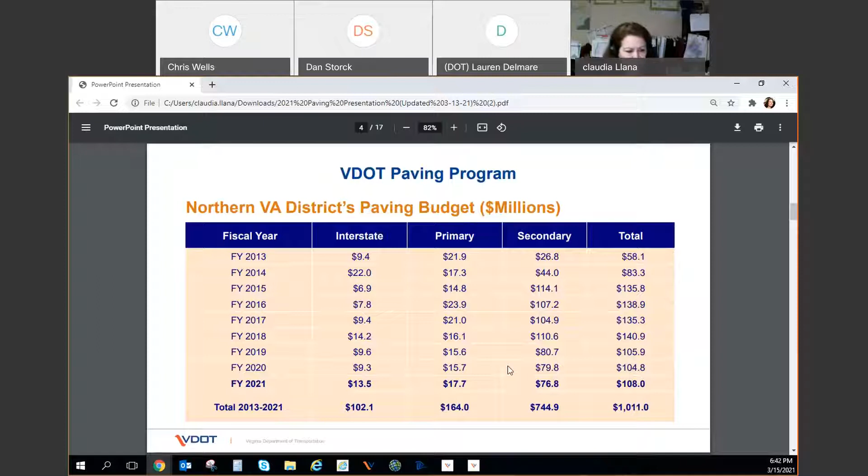And I will explain how those decisions are made coming up. In terms of the planning, yearly, at this time of the year, we're already gathering data for the next calendar year, 2021. In summer and fall, we take the data that has been gathered and put it together into bid packages as we make decisions on which roads need to get paved. We in the Northern Virginia District send those packages to our Richmond central office, where they compile the bid contracts that are put out to the contracting community.

Those are advertised for bids. Bids are received and evaluated, and a selection is made about which contractors will be given the work, and contracts are executed. Also, beginning very shortly, the actual paving begins, and for this calendar year, 2021, we have started the pre-construction meetings. In April, the actual paving work will begin.

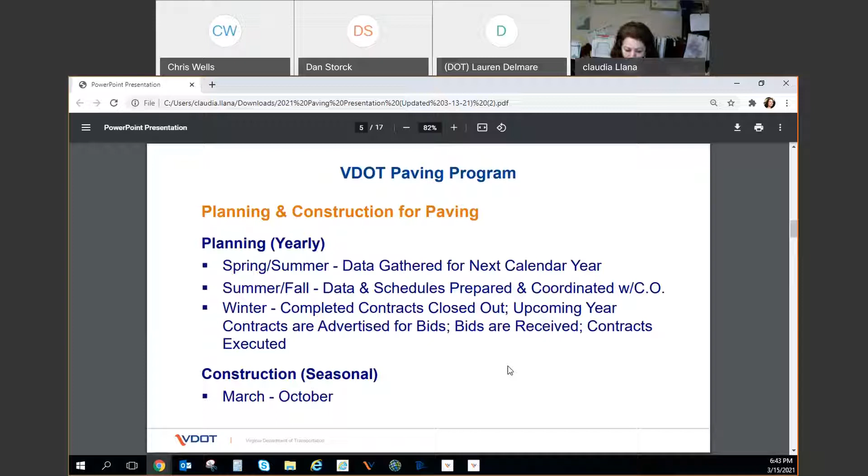In order to decide which roads get paved, we evaluate several factors. One of the main ones is the condition of the pavement. Also the traffic volumes. We avoid locations where there's going to be an existing project—for example, the Rolling Road project is going to get widened and the whole road will be reconstructed, therefore we don't do repaving in that particular location. We also avoid locations where we know that there will be large utility projects.

Another thing that we do is compile together areas that are close by. If in a neighborhood a main street has been determined to be in very poor condition and needing repaving, we also address the roads around it that also need repaving. This gives us economies of scale so that the contractor doesn't have to drive around, but would rather spend his time and our funds in paving rather than traveling. As you can imagine, our maintenance crews are out there very frequently and they're familiar with what the pavement conditions are in different areas, so we get feedback from them as well in our decision-making process.

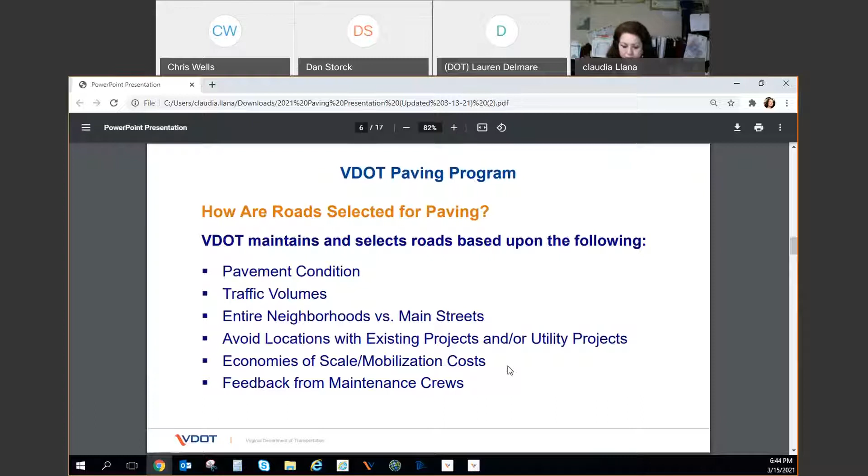In Northern Virginia, we have two highly qualified PhDs that review all the data that is gathered and help us make decisions about which roads to pave.

In terms of how we collect our data, we use specially fitted GPS-enabled vans with cameras that view under and to the sides of the van, gathering data about pavement distress, rutting, and texture. This information is collected digitally and put into reports shared with our staff for evaluation.

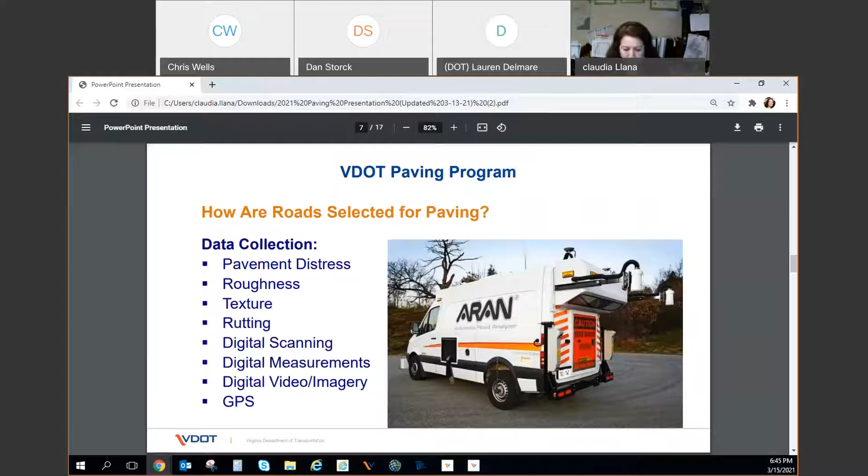That data is used to determine the condition of the pavement based on a system we call the Critical Condition Index. This was developed first around 1998 by the U.S. Army Corps of Engineers, and we've found it very useful and adopted it.

The CCI, or Critical Condition Index, goes from 0 to 100 for the different roads, 100 being excellent and 0 being very poor. We use color codes to match condition with rating. Roads in excellent condition are shown in green, those in fair condition are yellow, moving down to reddish and deep red for very poor condition.

Roads that have a CCI of 60 or better are grouped into the sufficiency rating, and we look at the percentage of roads that are in sufficient condition for the different road systems.

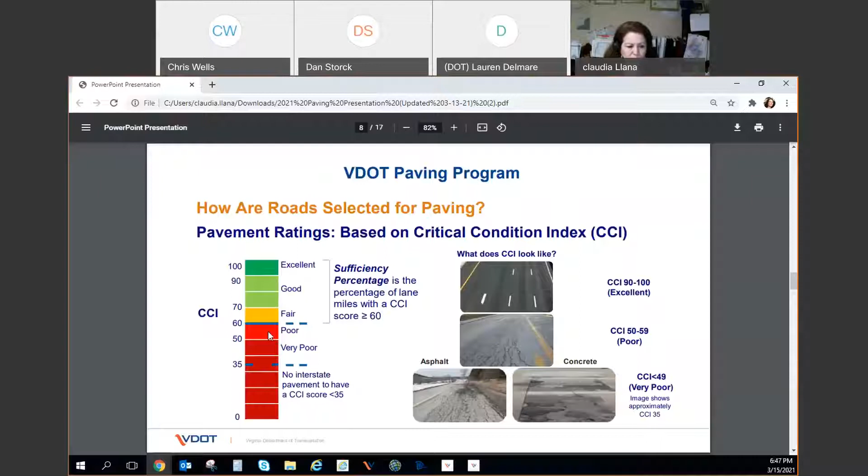This data is collected more frequently for interstate and primary roads. For those, we send out the specialized van, contracted annually. For secondary roads, we used to collect 20% each year, so it normally takes about 5 years to collect data for the entire secondary road system. Beginning this year, we're grouping high volume secondary roads, such as Braddock Road, those with AADTs, or average annual daily traffic, in excess of 3,500 vehicles, and treating them differently.

We're collecting that data annually. The reason is that interstate and primary highways have more volume and people travel faster, so in order to avoid crashes and take more care of higher traffic roads, we have higher goals for them and inspect them more frequently.

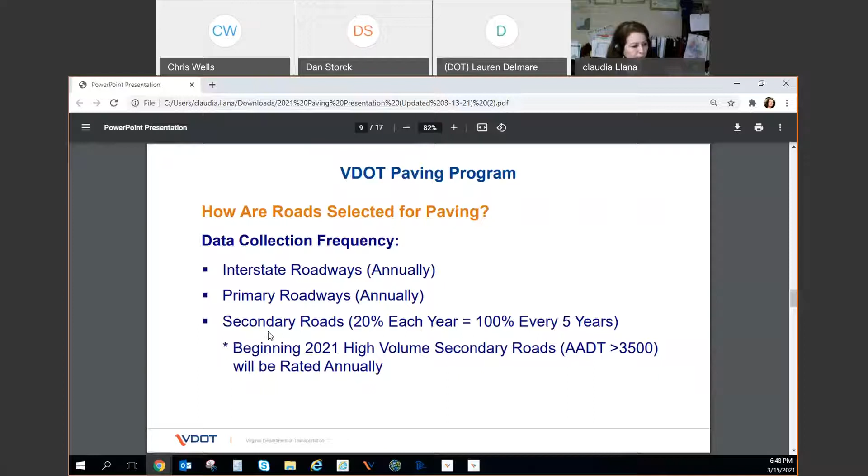This slide refers to the performance goal, the percentage of the network that should have a CCI greater than 60. For all roads with high traffic volumes exceeding 3,500 vehicles per day, we're seeking a goal of 82% with a sufficiency rating of 60 or better. For lower traffic volume roads, the goal is a little lower: for primaries it's 75%, for secondaries it's 60%. This doesn't apply to interstates because no interstate has lower volumes than 3,500 vehicles per day.

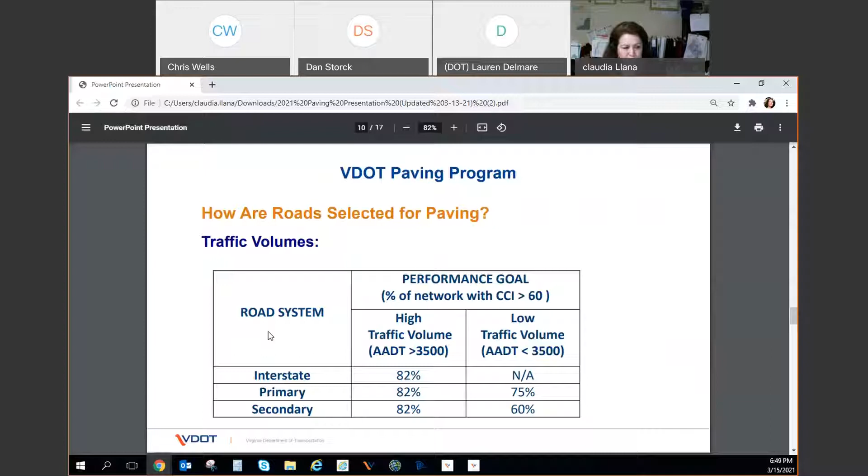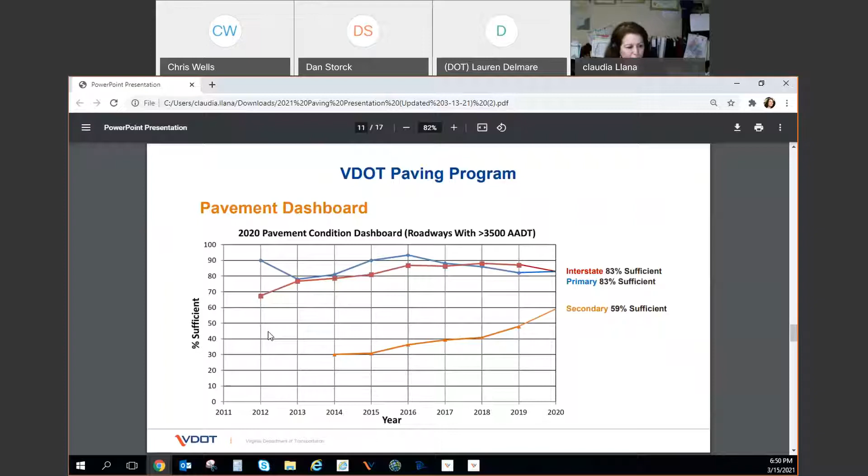This slide lists the different pavement types used depending on road condition and volume. Preventive maintenance is a type of treatment that stretches the life of the pavement. It can be slurry seal or latex, or patching, which is not as extensive but much better than filling potholes, using a hot mix rather than the cold mix used for potholes. We also routinely seal cracks, all intended to extend pavement life, used on roads with lesser volume or not as bad condition.

Depending on volume and condition, we also use plant mix. Corrective mix involves a bit less milling and overlaying than when we're looking to restore. The most intense treatment is full depth reclamation, which is almost a rebuild, even the base of the road may need reconstruction. This is only used rarely, when the road is in such bad condition that we have to dig down beyond mill and overlay.

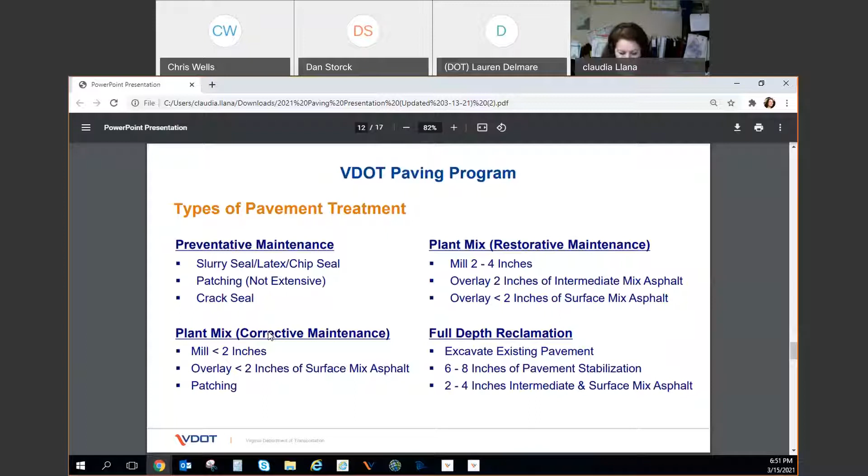This slide shows a pavement condition map. It can be found at virginiaroads.org. In this particular slide, there is a location somewhere in the neighborhood of Reston, and you can see that the roads have different color codes. The green are roads that, according to inspection and data collection, are in good condition. Blue is excellent condition. Fair is yellow. And red and pink are those in poor or very poor condition. Those are the roads that are candidates for repaving.

This particular slide shows that there is nothing on the left side, and that is because this is the town of Herndon. They do their own maintenance, so we don't rate those.

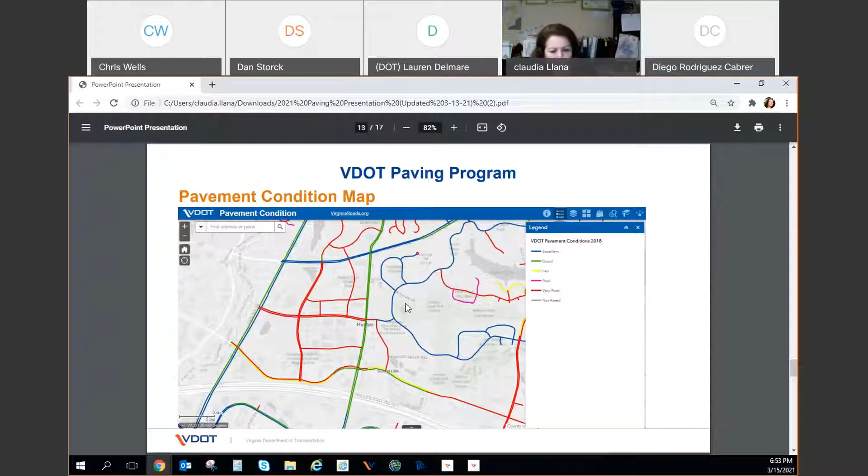This slide shows what a paving status map looks like. In particular, this location shows a 2020 statewide paving status map. When the 2021 map is out for the public to view in April, in less than a month, you'll be able to see which roads in your neighborhood are getting paved.

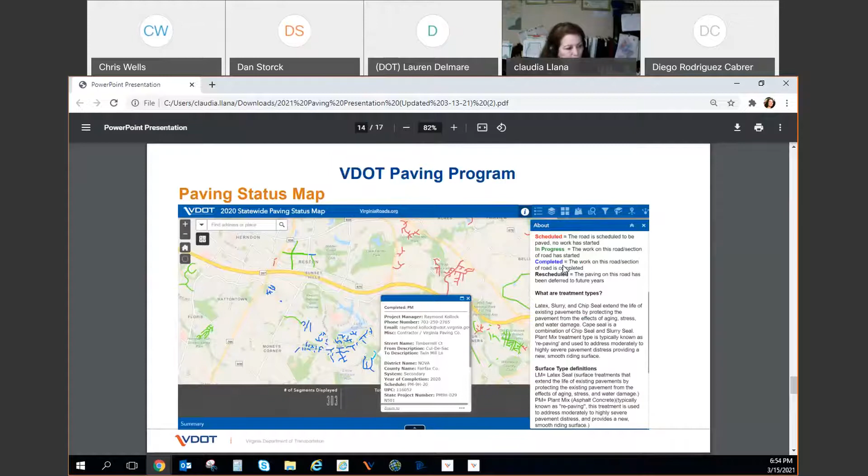Chris had made reference to striping the pavement. It's like a fresh canvas. The typical, more common way is, once the road has been repaved, to replace in kind. In other words, put back what was there before, with some minor adjustments as needed, such as adjusting a crosswalk or adding an edge line.

Occasionally we make some adjustments or changes for safety and operational improvements, for example lengthening a turn lane or creating a new turn lane. In those occasions, again for safety or operational needs, we also have to make sure the pavement underneath can handle the new load of actual traffic driving over it.

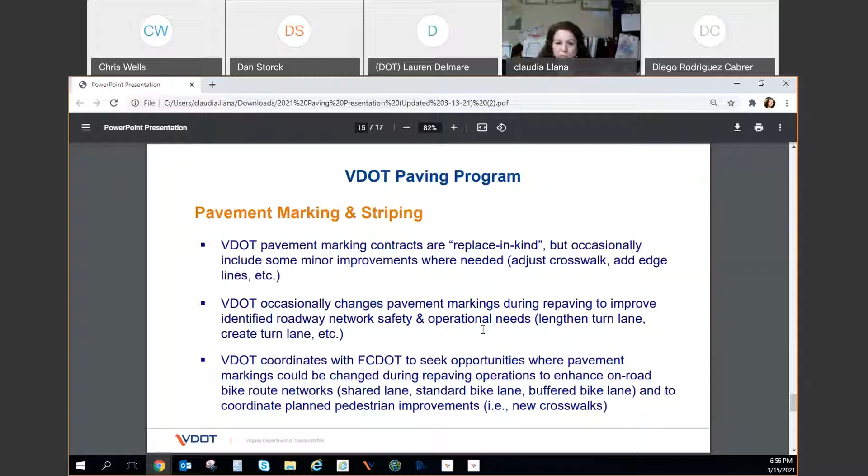The next type of pavement marking is where we collaborate with Fairfax County DOT and Chris and his staff, looking for opportunities for changes such as Chris referenced, bike lanes or road diets, or sometimes pedestrian improvements such as new crosswalks. Chris will be referring to that after my presentation.

This slide shows where you can report a road problem or submit a maintenance request. You can call 1-800-FOR-ROAD, which is managed 24 hours a day - that's our customer service center. Or you can go online to myVDOT, which you find at my.vdot.virginia.gov. In these places, if you see the need for a sign to be replaced or repaired, a pothole, or other things that need attention, you can call us or enter your information in these two sources.

What I've included here also is how you can find the pavement condition map at virginiaroads.org. You search under web maps. You can find both the pavement condition map and the paving map. As I mentioned, right now we only have the 2020 paving map, but in less than a month the one for this year should be uploaded.

If your road is scheduled to be paved, a couple of weeks before that happens you will see signs being placed next to the curb, letting you know that is happening, and also asking you to not have cars parked in that area. It will be very specific in terms of the date, so it'll be clear to everyone.

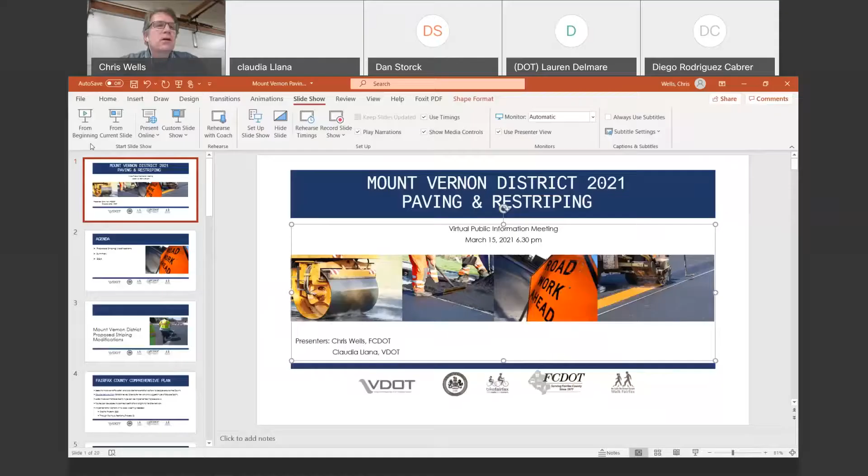I'm Chris Wells, Fairfax County Department of Transportation. We have a partnership with VDOT, and what I'm going to go over tonight is our proposed striping modifications, a summary of what we're doing, the benefits, and then we'll take questions and answers at the end.

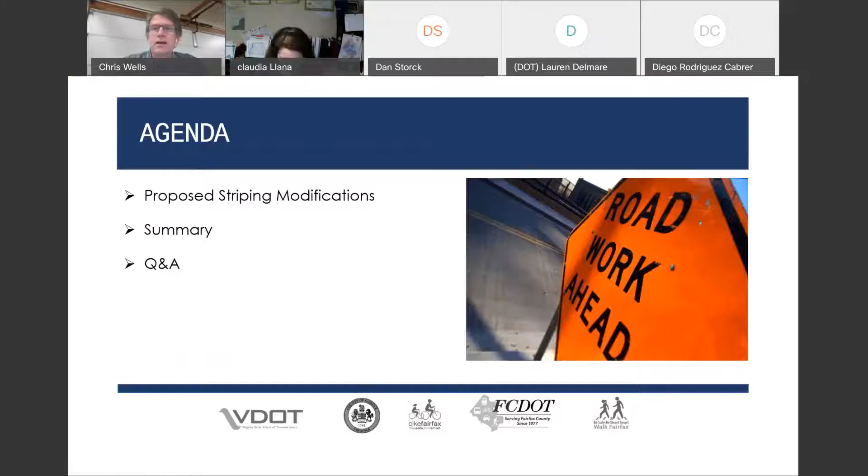The first part of it is we're trying to implement the Fairfax County Comprehensive Plan. We have a bicycle master plan and a goal in the county to help with our traffic issues by making it as easy as possible for folks to walk safely and bike safely in the county. In the Mount Vernon district, we've actually had a lot of success over the years adding bike lanes as part of this summer repaving process.

The basic idea is that when we get the draft list of roadways from VDOT, we look to see what roads might be too wide. They're either 2-lane roads with very wide travel lanes or parking areas, or 4-lane roads that don't have the traffic volumes that need the capacity of a 4-lane road. What we found over the years is that there are other community benefits that a majority of the population are interested in, and we've been able to put that together and improve the way we work with VDOT.

In the past few years, VDOT has had a consultant actually engineering out all these striping plans, so things such as turn lanes and intersection corners are much better delineated as part of this process.

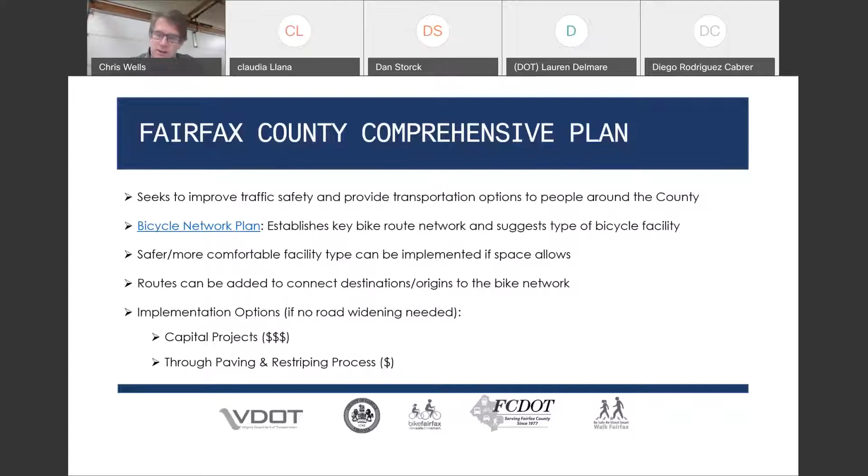So again, it's a very cost-effective process. There is a cost, it's tens of thousands of dollars throughout the county, maybe it totals $500,000. But versus our cost to build a sidewalk or trail these days, which is $5 million a mile or $10 million a mile, this is an extremely cost-effective process, and one that has shown benefits.

I'll talk about those in a minute. One other aspect is that America has focused for decades, since the 1970s, on bicyclists in the wrong way.

We focused on the on-road bicyclist, the type A cyclist, the confident cyclist comfortable riding in traffic. So traditionally all we've done is bike lanes on major roadways, and in Mount Vernon District, Beulah was one of the very first in the county. But we know that most citizens are not comfortable riding their bike next to 45-mile-an-hour traffic, and certainly families with kids are not.

The other thing we've wrongly focused on for decades is just the commuter. Can somebody commute to their job on a bicycle? Of course, we have a very large county, 400 square miles, and it's not reasonable to think that people are always going to be able to commute to their jobs. But it is very reasonable to give them the opportunity to do things within their community, such as go to a store, their places of worship, parks, schools, and do that on a bicycle without using an automobile for that trip.

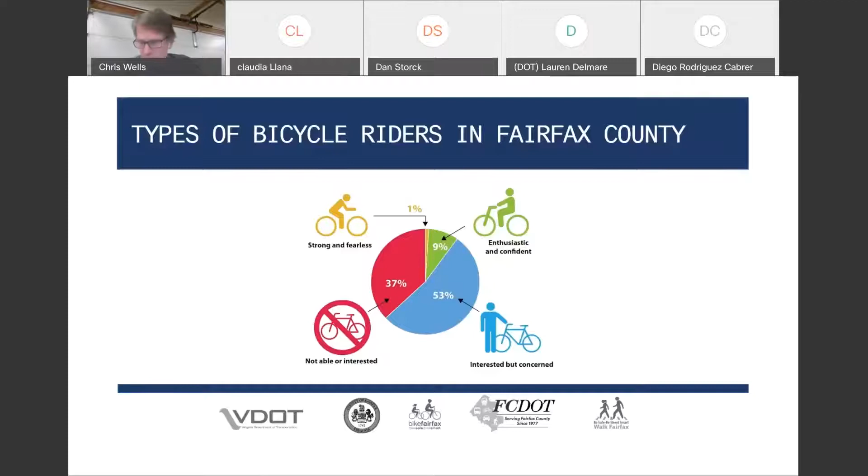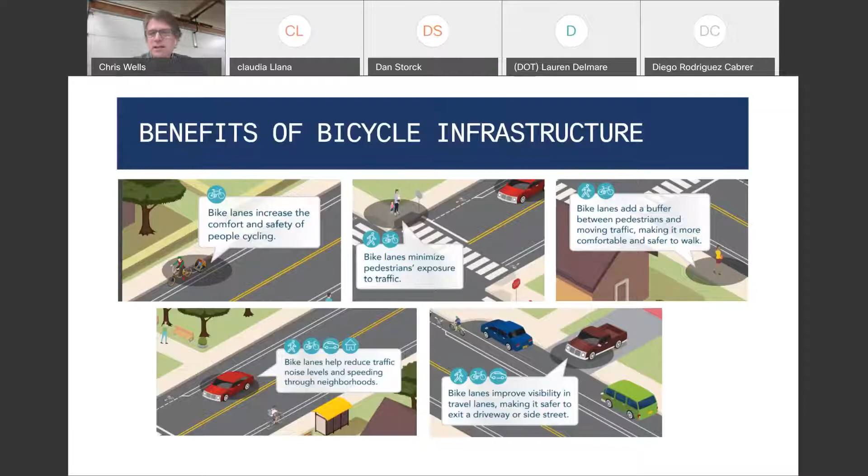Engineers use something called a sight distance triangle. It's the triangle of vision that you have around obstructions, such as parked cars. And when those vehicles have been moved towards the center of the roadway, that sight distance is improved. So the bike lanes actually help your sight distance pulling out of your driveway.

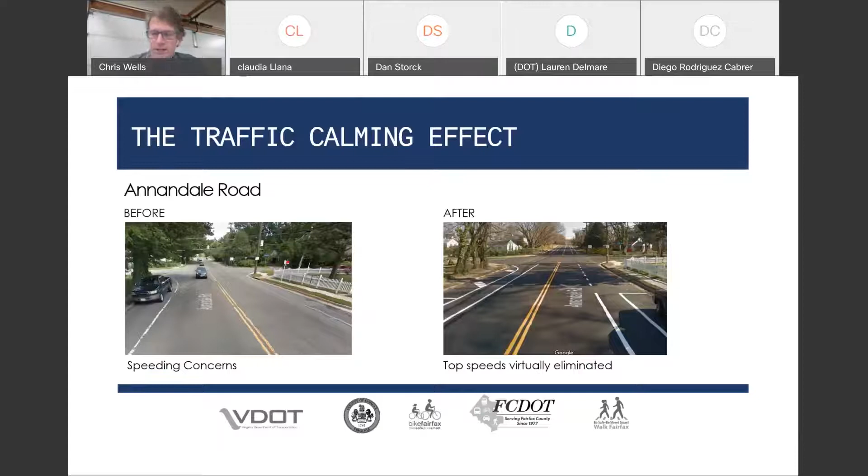We use on the right what's called puppy tracks, those little dash dots, to indicate that's how you're supposed to merge and make a right turn into the bike lane. And again, you can see the before and after difference of a much more organized street environment.

So for this year in 2021, as I said previously, we've actually done many roads over the years in Mount Vernon, and we are beginning to get some connectivity between some of these roads in the network. This year we have...

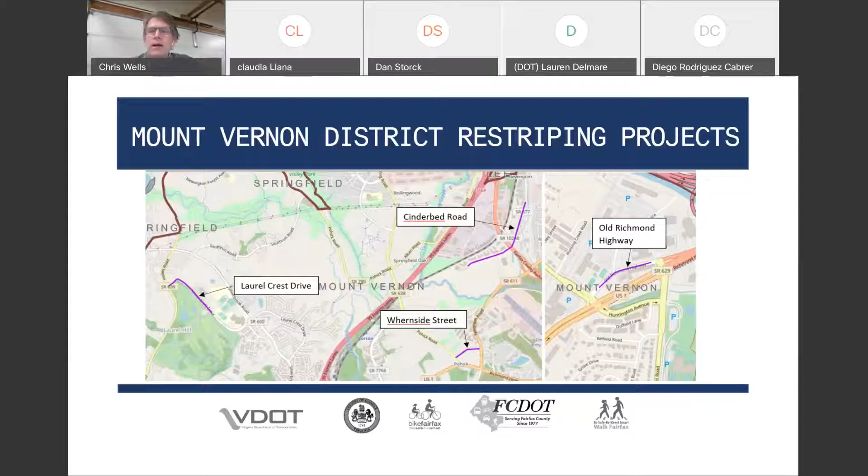three roads sort of off the Route 1 corridor, and then one road along the Route 1 corridor. So the 3 roads over in the Lorton area are Laurel Crest Drive, the VDOT portion. The other portion of Laurel Crest Drive is not being paved. Whernside Street between Pohick and Telegraph, and Cinderbed Road from Newington Road to its southern end. And then at the other end of Mount Vernon District, up at the top of Route 1 at the Beltway, is Old Richmond Highway. I'll show you pictures of each of these and go over what we're talking about.

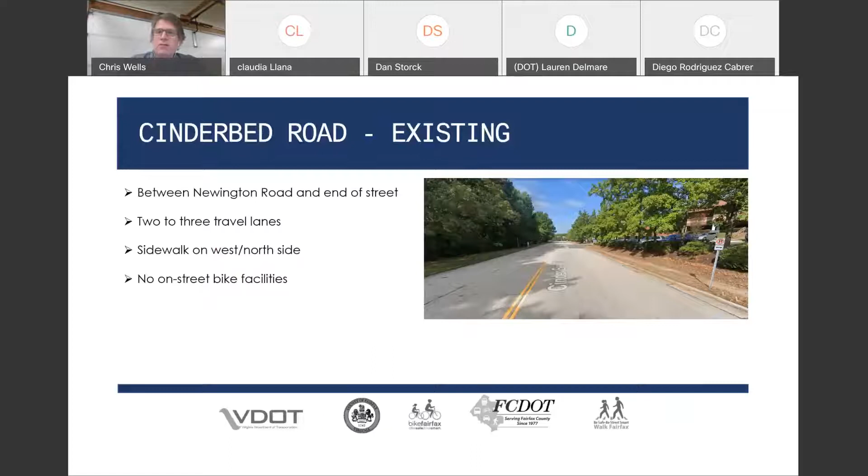So Cinderbed Road is mainly industrial office between Newington and the southern end. Its existing conditions are 2 to 3 travel lanes. It does have a sidewalk on the west or the north side, but no on-street bike facilities. But as you can see in the photo, it is plenty wide.

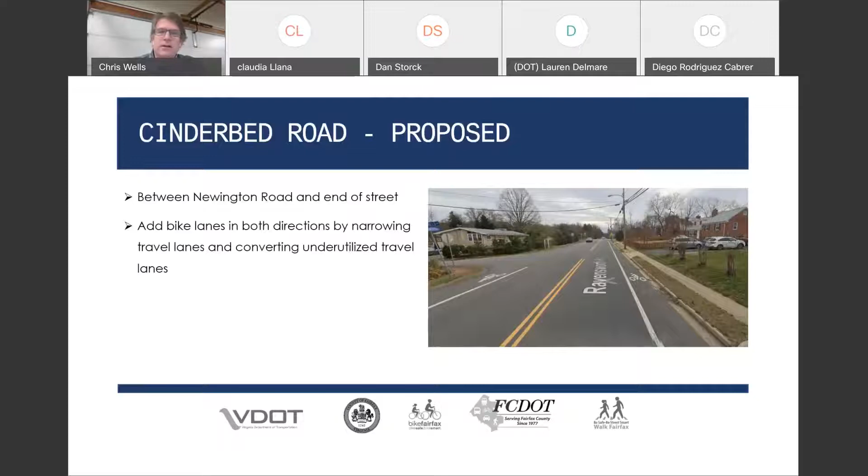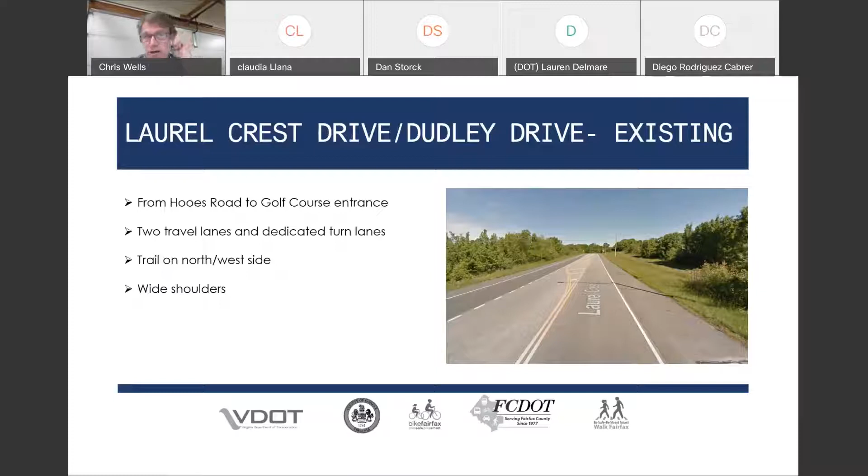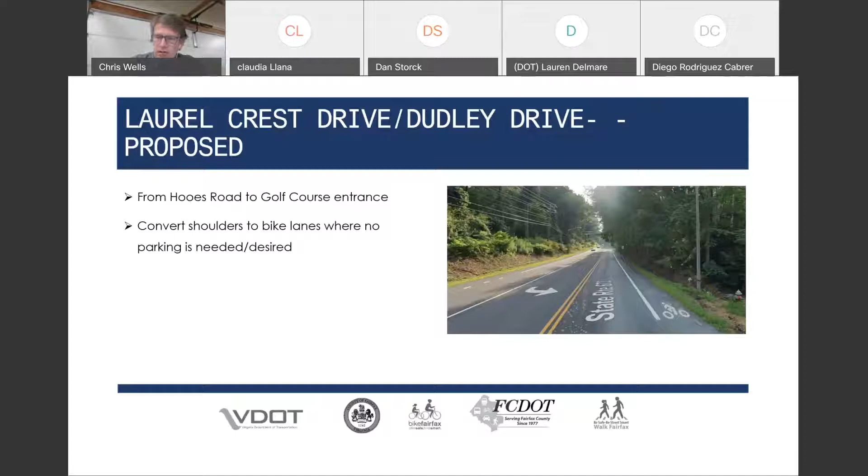And so the area we're talking about is from Hooes Road to the golf course entrance. And what the proposal is for Laurel Crest Dudley is something that you see here, where you have the shoulders converted to bike lanes where there's no parking needed or desired. And again, the standard travel lanes in each direction with the turn lanes remaining, the three-lane cross-section of turn lanes and travel lanes in each direction.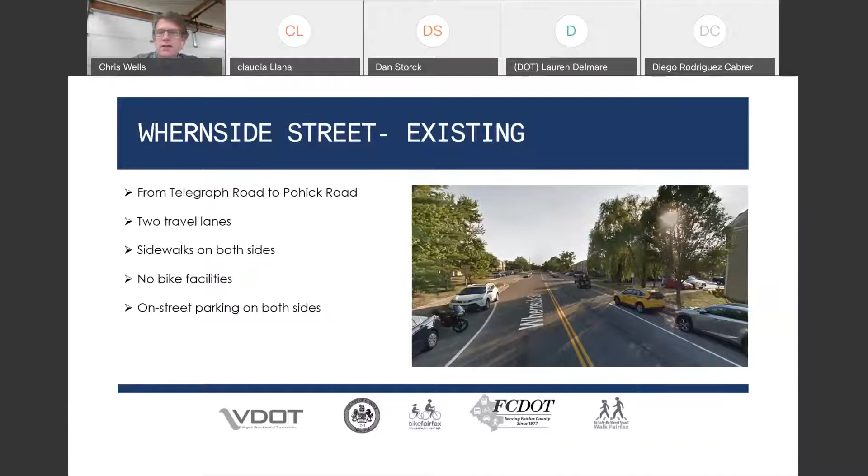Whernside Street between Telegraph and Pohick is a residential collector road through multifamily density housing. There is 1 travel lane in each direction, sidewalks on both sides, and on-street parking on both sides that we will maintain. So the proposal for Whernside is to add a bike lane in one direction while maintaining legal on-street parking on both sides of the road.

One of the questions we're often asked is, will you be taking parking? Parking is extremely important and sensitive in our county, so generally we don't. However, full disclosure, as I said, it is engineered. So if there are bus stops, fire hydrants, or other areas where people are parking illegally today, even if they don't know it's illegal, those areas will be better delineated by the striping. So the full answer is yes, a few parking spaces may disappear by the striping, making it more readily apparent that they're not available for parking. Although again, we're just reflecting the laws that restrict parking.

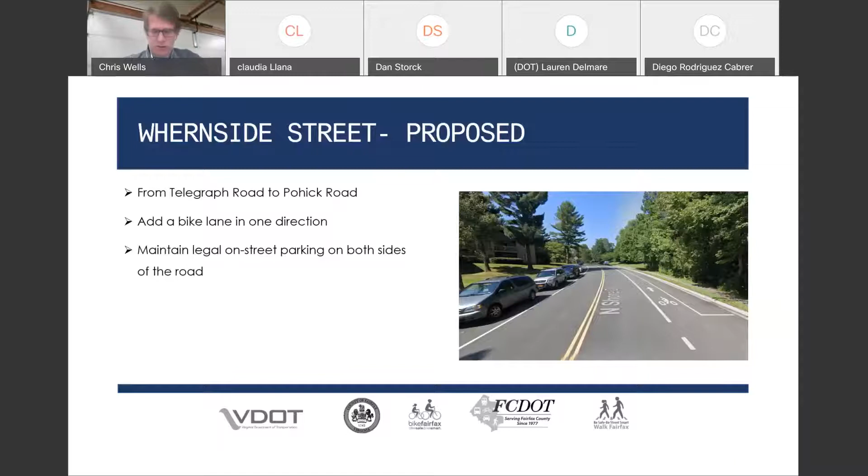One other aspect of this, which I should have mentioned earlier, is pedestrian safety. Pedestrian safety is a hugely important thing in this county for the Board of Supervisors. I've personally had the pleasure of working on this issue for the county since the pedestrian program was created in 2002. In the most recent years, working with VDOT, we've been able to programmatically look at these roads that are being paved and look at the existing crosswalks to see if we can upgrade them to the high visibility block pattern you see in the photograph.

One of the purposes of tonight's meeting is to get community feedback from you all. Our staff will look to see obvious pedestrian generators, such as elementary schools and activity centers. But once the paving maps become live so you can review the roads being paved in Mount Vernon, if you see a road with a long-standing community request for a crosswalk or something like that, please let us know, even if it's after the comment period is closed, because that's the type of thing we want to try and react to.

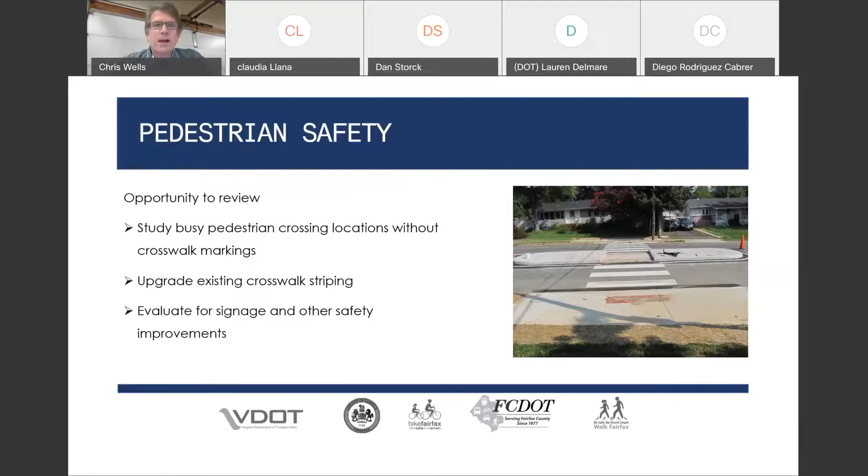If not, then we'll have that on our unfunded project request list for future transportation funding, and we can always come back and add that. It's just that if there's an opportunity to do it this summer with the paving, that's the most cost-effective way to do it. So with that, I'll go to the community feedback information on this slide and the contact information on the next slide. There are two parts to this presentation.

If you have comments about paving, like wanting your road paved, or other things for VDOT, this is, as Supervisor Storck said, sort of a once-a-year opportunity for folks to have an audience with VDOT and let them know of something that needs attention.

The best way to reach VDOT is through their very robust customer service portal at my.vdot.virginia.gov, or by calling 1-800-FOR-ROAD, which is 1-800-367-7623. If you have striping related comments based on what we in the county have proposed, you can reach out to us, and that's on the next slide.

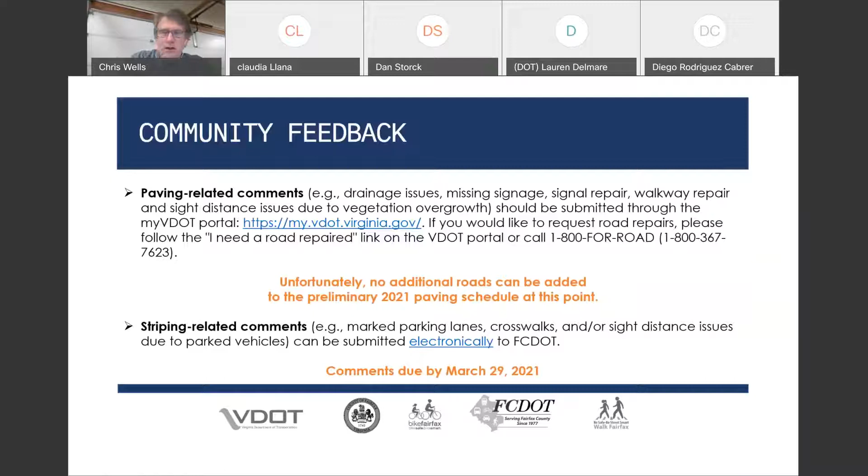We ask that you give us your comments by March 29th, but again, we work for the taxpayers, so you can give us suggestions year-round, of course.

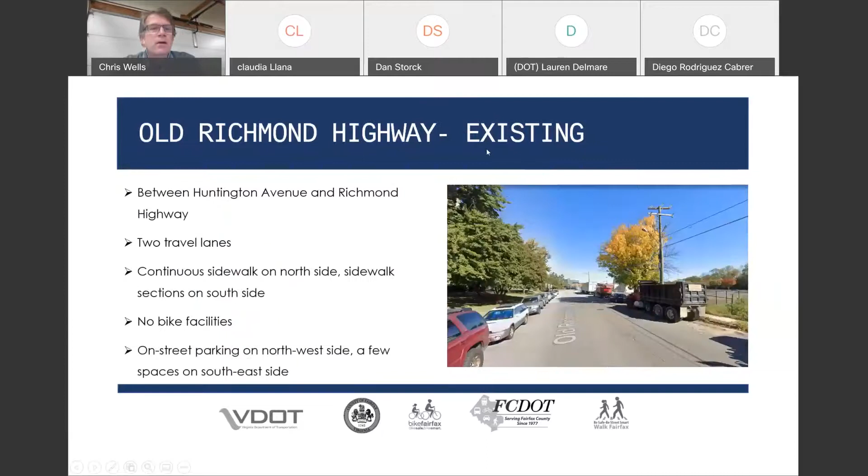Sure, great question. I was trying to make my PowerPoint go back—oh, there we go. So that's the existing. The proposal is for bike lanes in both directions and maintaining the parking on one side.

I am not an expert in our commercial parking restrictions. We do have some limited ability to restrict commercial parking in the county, but what the striping will do is eliminate the parking on one side, so they'll no longer be parking on that side at all. The remaining parking on the side that has parking, unless there are restrictions, would still be open.

Unfortunately, if it's commercial parking that is not legal, that is an enforcement thing for the police. Sometimes there are vehicles that don't meet the definition of commercial vehicles, and so even though they may not be desired, they are actually legal. But other than stating those basics, I shouldn't say anything more because I'm not an expert on that.

What you can do is contact the Mount Vernon District Board of Supervisors office to see what opportunities there might be for the county to institute any restrictions. But again, my understanding is it's fairly limited as to what we can do.